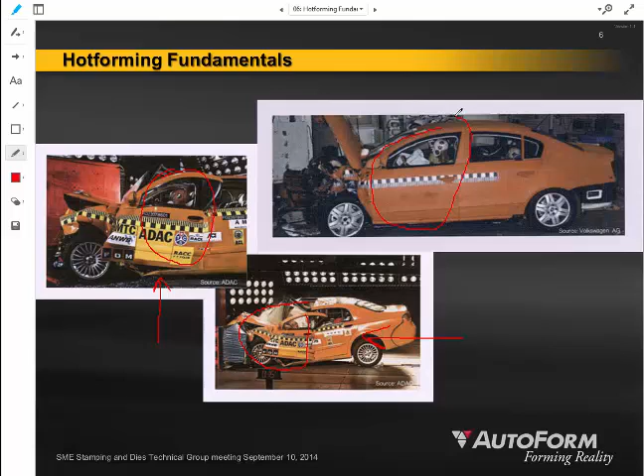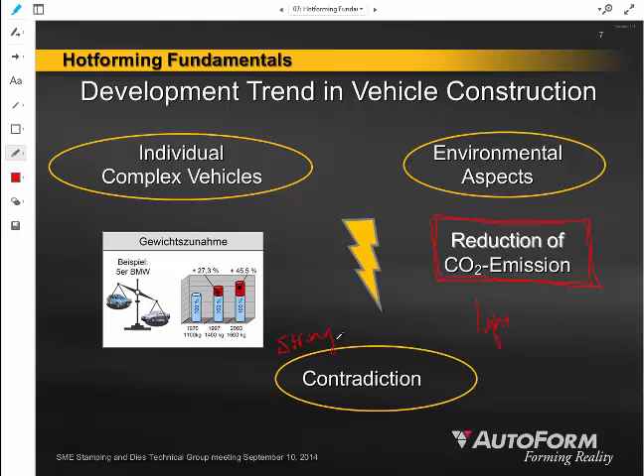But of course our vehicles are getting more and more complex. The shape, the content, the safety we're trying to achieve are all increasing the complexity of the parts we have been making and will be asked to make in the future. So hot forming is really something we're trying to do to address that contradiction of how to make it lighter but still stronger and with more function. We're using this new material of boron hot stamping steel to address that.

To resolve that contradiction, we're using increased lightweight alloys. We're seeing people going back to aluminum, for example the Ford F-150 all-aluminum truck body. That was done to maintain the strength and stiffness integrity Ford wanted while still making a lighter and safe vehicle for better fuel economy. So that all-aluminum body and frame was an attempt to go for lightweight alloys.

However, one problem with aluminum is that it's still very CO2 intensive, meaning if you make a high-aluminum fleet, you'll still have a relatively large CO2 footprint overall. That's one of the things behind the increased use of high strength, ultra high strength, and advanced high strength steels—to ensure strong, lightweight, safe vehicles with great integrity that don't necessarily increase the CO2 footprint.

So this is one way we're trying to do it: material with better strength at a reduced thickness. However, this has a double impact on our ability to deform the material. As you go to stronger materials, they have a tendency to resist the desirable deformation we're trying to apply when sheet metal stamping or stretch forming, because the whole reason we wanted the high strength material is so it resists undesirable deformation in a front impact or offset frontal impact. However, that also means the material inherently wants to avoid the deformation we're trying to apply in a sheet metal stamping die.

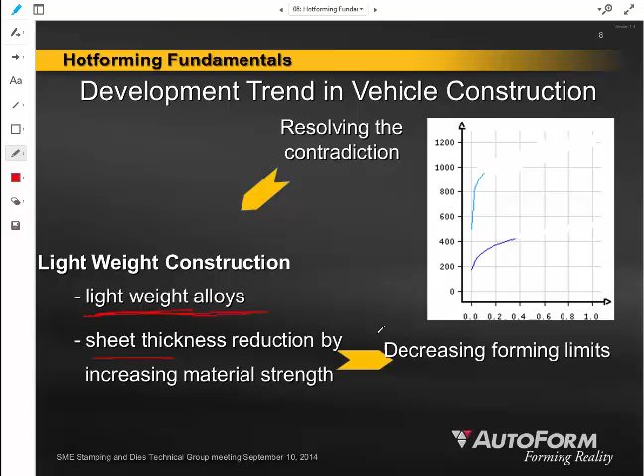You can't necessarily have it both ways. Can you have a material that resists undesirable deformation but accepts what we think of as desirable deformation? Generally, I have to say no, the material cannot tell the difference between desirable and undesirable deformation. Hot forming and hot stamping is a way around that, because using temperature and heating the material up differentiates the desirable deformation in the hot stamping operation from the undesirable deformation, which would be deformation at ambient temperature of a vehicle in a crash.

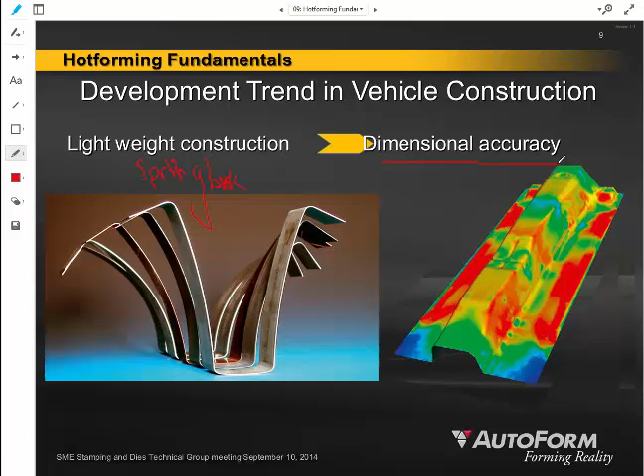Other challenges raised by trying to go to these advanced high-strength materials: not only are stronger materials typically more difficult to form, with lower forming or formability limits, but they also tend to have greater amounts of spring back. So as we've tried to introduce lightweight vehicle construction, whether high-strength steel or aluminum, we see a greater amount of overall spring back. That makes it very difficult to achieve our dimensional accuracy goals, our PPAP goals. It doesn't matter if I can make the part if I can't make it dimensionally accurate to the right size, shape, and tolerance—that new strong or lightweight component doesn't do me any good. These are the challenges that we're using hot stamping and hot forming to try to address.

Boron steel is a high carbon steel. It's got significantly more carbon than a typical stamping steel. When we think about mild steel and draw quality, we're usually talking about material with a carbon weight percentage of 0.08 or below. If you've heard people talk about steel using the SAE designation, like 1008 steel or 1010 steel, that 08 represents the maximum allowable carbon by weight in that material. So this hot forming steel has at least 3 times as much carbon as your typical mild steel.

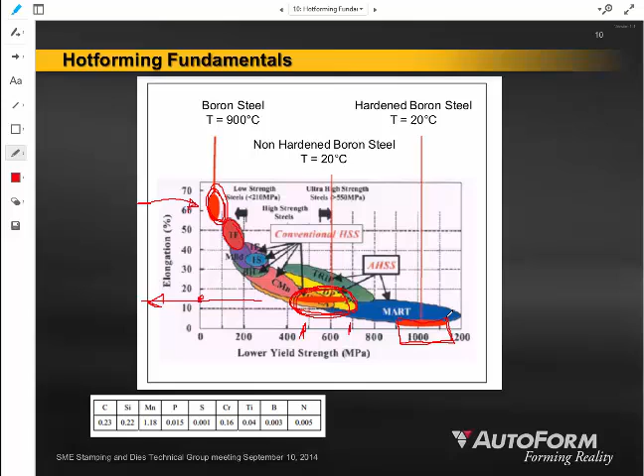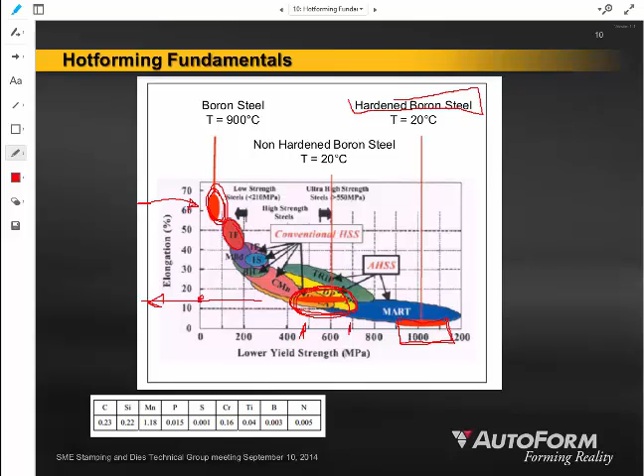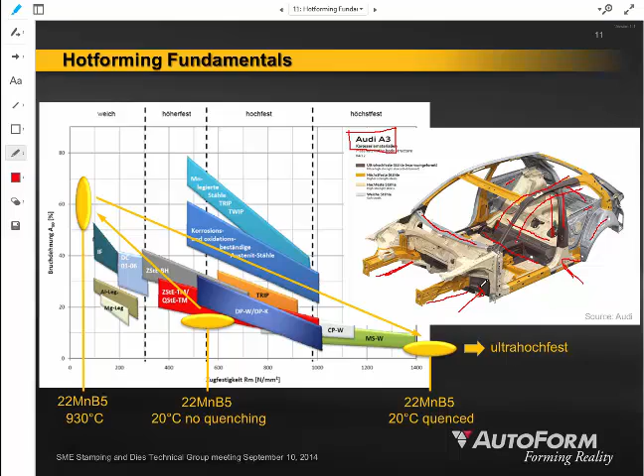For these materials we see a similar chart to the previous illustration, but this one, provided by Audi, shows the content of high-strength steel inside the A3 vehicle model. You can see regular mild steel used for components like the cowl, the wheelhouse, and body-in-white panels that are not structural. However, the engine compartment uses advanced high-strength materials, and we see hot forming materials in the A pillar, the B pillar, the impact beam across the width of the car, and the firewall—all areas where we want high strength to ensure the passenger compartment doesn't experience intrusion during an impact.

This is all because of the metallurgical effect some people call the nose diagram—the time-temperature characteristics of these high-carbon boron steels. When you heat the material to this higher temperature and then allow it to cool slowly, it forms a certain microstructure, whether ferrite, pearlite, or bainite. These are the microstructures of common carbon steels.

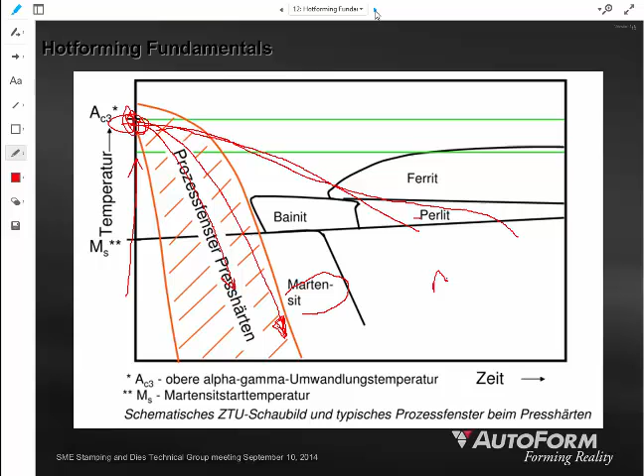However, if we take that material up to temperature and quench it in a rapid enough sequence, we bring it into a characteristic we call martensite. Martensite is a microstructure common to these high-carbon materials that is much stronger than we'd expect in a mild steel with a ferritic or austenitic microstructure. So it's desirable with hot forming to heat the material to around 900 degrees and then quench it rapidly to force this martensite microstructure to form without passing through other phases. That's the reason and the benefit of using these hot-stamped, hot-forming boron materials.

When we think about hot forming, there are two ways to think about it. Another term for hot forming is press hardening—if you hear people talk about press hardened materials or die hardened materials, they're talking about the same thing. They take a blank of material, heat it up, form it, and during that forming operation, quench it to this martensitic microstructure, the martensitic phase. There are two schools of thought here: direct hot forming and indirect hot forming.

Direct hot forming starts by taking the coil of material, unrolling it, creating your blank, taking that flat blank and passing it through a furnace to heat it up very uniformly to a temperature around 950 degrees Celsius, loading it into the stamping die, and inside of the die not only deforming the material, but as we're deforming it, also cool it and quench it down to ambient temperature.

Something in the ballpark of 100 to 80 degrees C. When you get this material down into that range, you've already cooled it sufficiently that it's going to have the appropriate microstructure. Then potentially you could use a robot to gingerly unload that blank, let it go down to the conveyor belt so that it can get racked, or bring it to another station for laser cutting, laser trimming. This is what we would call direct press hardening or direct hot forming.

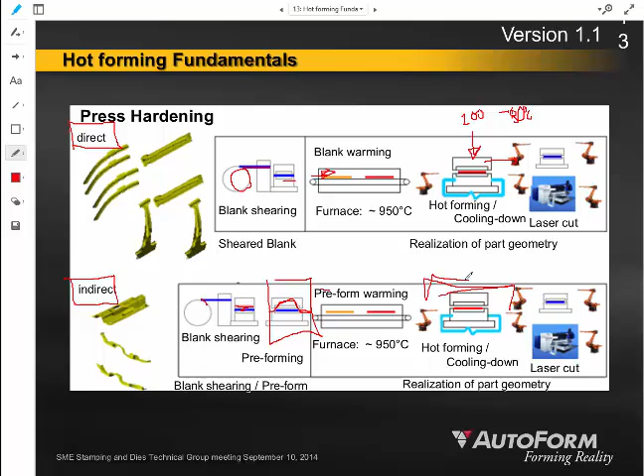If we do the preforming at ambient temperature initially, that allows us to do a little bit of initial stretching of the material and hopefully maintain relative uniformity, or at least less localized thinning behavior. Then we can put it through the furnace, take the preformed piece and now heat it up to 950 degrees C. Then stamp it even more in this temperature controlled die in order to quench it, and then go to the laser cutting. That would be indirect hot forming.

So we can see that a variety of manufacturers... here's a picture provided by Volkswagen for the Volkswagen Passat. Their use of press hardened materials on their most recent Passat allowed them to reduce, on average, most of their sheet metal thicknesses of these parts highlighted in red, each reduced by about 0.2 millimeters in thickness. That also meant we could reduce the overall number of parts.

They're able to take what used to be a stamping plus a reinforcement and replace those two different parts in the assembly with a single stamping that is press hardened. That reduced the overall number of forming operations and therefore reduces the amount of tooling. And if you reduce the amount of tools, then presumably you are driving down, in one aspect, the manufacturing cost.

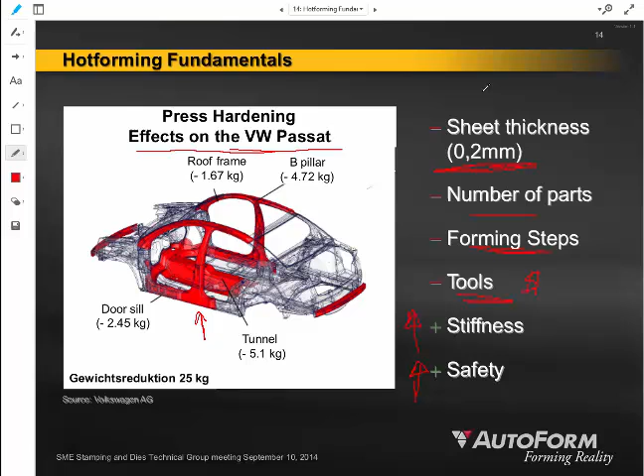They were able to do this and in the meantime achieve an increase in overall part stiffness, because now if we have fewer parts in our assembly, the assembly is more integral and therefore stiffer. And of course an overall stronger component, because we've achieved a stronger component while reducing its mass. That has very positive effects on passenger and vehicle safety.

So here are some other parts that were used. Again, that was the Volkswagen Passat, but there are components that you might see people hot stamping. Here is the tunnel - it used to be a single component with 2 reinforcements on the outer and 2 reinforcements inside, which is now a single stamping. 5 kilograms, that's a 10-pound reduction in the assembly.

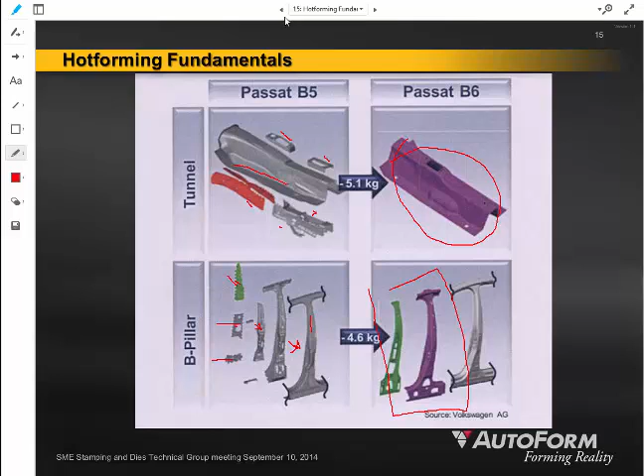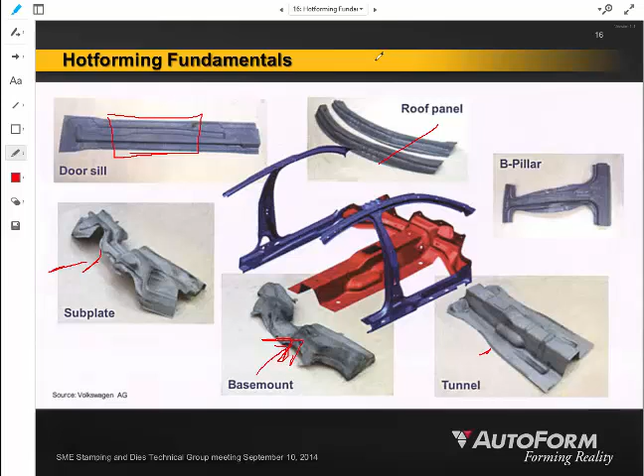And we've seen in this example a B-pillar. The B-pillar used to be the B-pillar itself, a B-pillar inner, a B-pillar reinforcement, and then reinforcements for the pillar, the hinge, and the latch areas. By reducing those to just 2 hot formed components, we saw also a 4.6 kilogram reduction in overall vehicle mass. Similarly, door sills, roof panels and roof bows, B-pillars, tunnels, the firewall base mount, and the subplate at the front of the passenger compartment are all candidates for this hot stamping.

So we are seeing an increased amount of content in our vehicles.